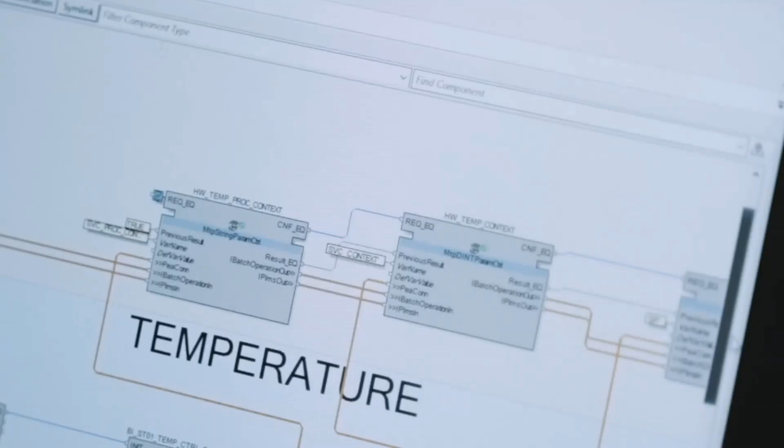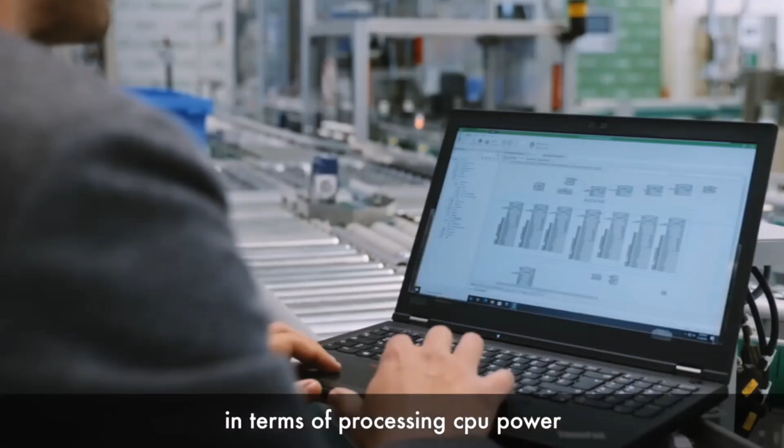universalautomation.org is about sharing a technology, a shared runtime execution engine. We call it a game change in automation because we have first one technology which is based on the IEC 61499 standard, which aims at decoupling hardware and software. Hardware itself is becoming very performant in terms of processing and CPU power.

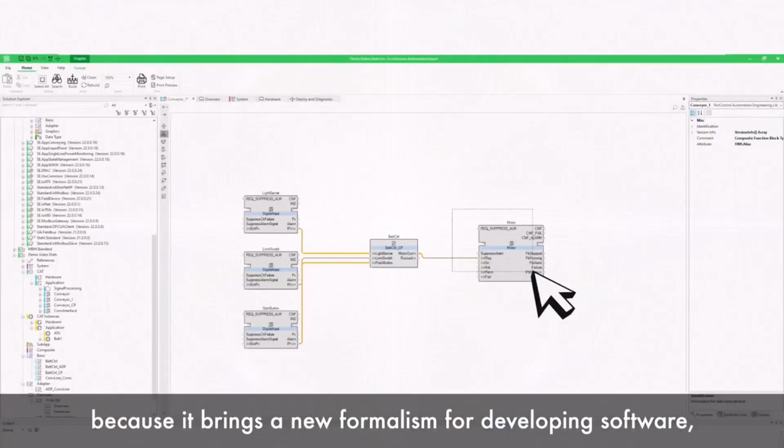And the future is more and more about software. This approach is really a winning approach because it's very flexible. You develop the application once and you can reuse it in each different configuration. That's exactly what Universal Automation and 61499 enables, because it brings a new formalism for developing software, which is object-oriented in nature and which allows deployment over distributed hardware for the actual final control system.

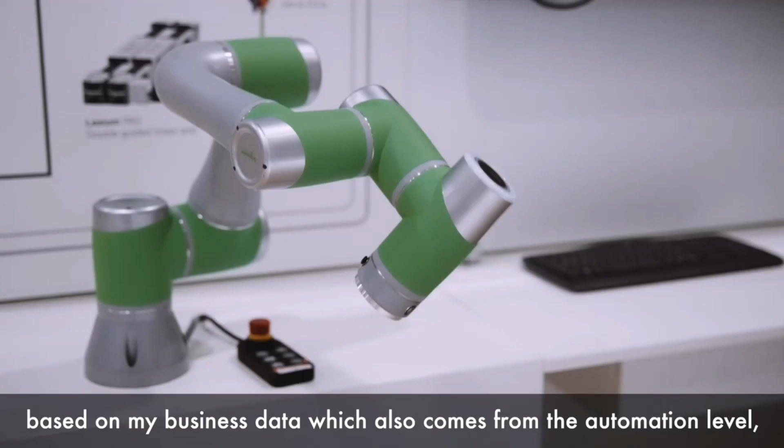So let's say that it's a marriage made in heaven. If I want to make more conscious decisions based on my business data, which also comes from the automation level, I need universal automation to get this data in an efficient way and with the right engineering efforts on the level when I can do and run the analytics.

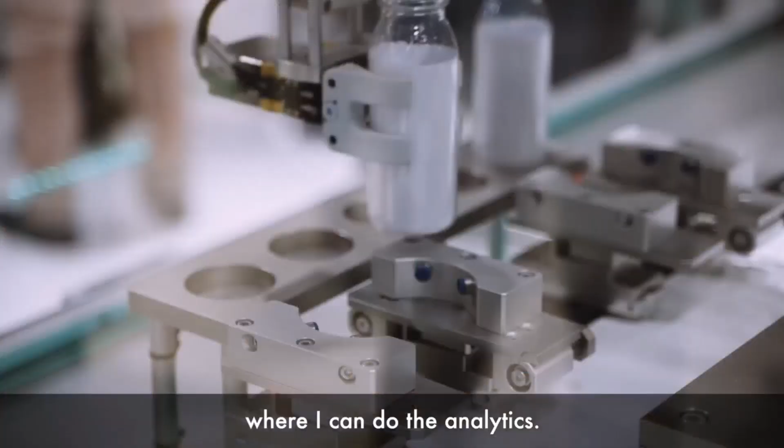Offers are available, not just from Schneider Electric with EcoStruxure Automation Expert, but also from Advantech, from Stahl, from ESA in Italy, and from other companies.

Advantech is growing really fast. And I believe if you want to keep on growing in the future, you need to be able to innovate. And when I see the universal automation approach, it is exactly the way of innovation we need to go with.

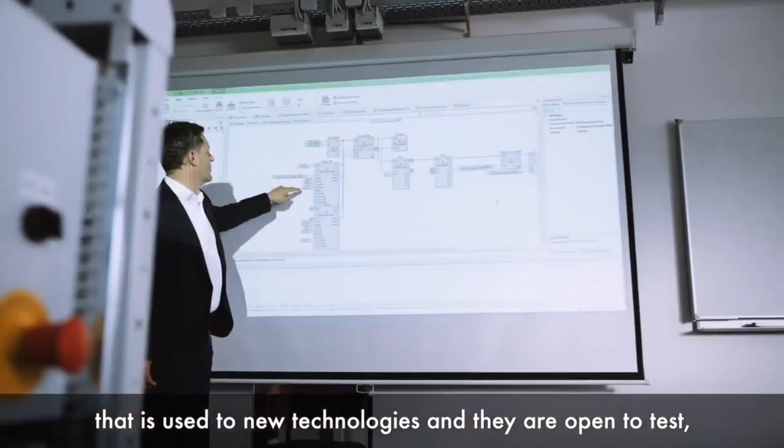Most of our customers from process automation are pretty conservative, so never change a running system. But now we see a new generation coming up, who are used to new technologies, and they are open to test, to try these new functionalities. And I think most of them pretty well understand the advantages of this.

I've been doing this now for 20 years, and I think over the years, this is the most exciting change. From my experience, I see that in IT, for example, there has been a big revolution. And I expect the same in automation. I don't know when it will happen. Probably it takes a little bit of time, but probably a revolution will come.

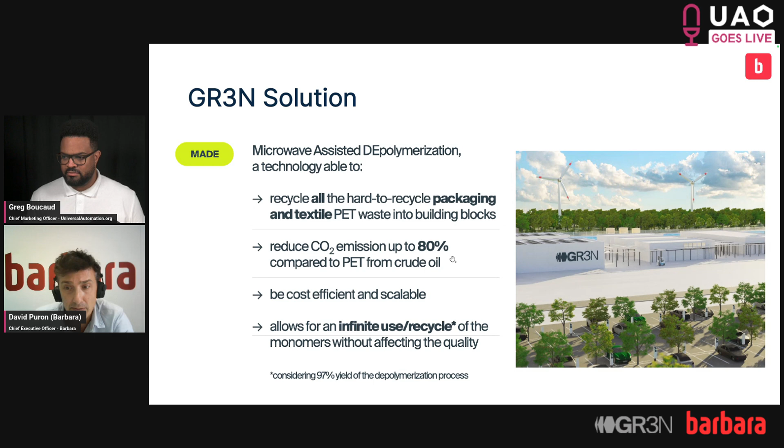Sustainability is something we really need these days. The challenge Gr3n has is that their manufacturing or recycling lines need to handle different types of plastics - bottles of different materials, different types of blends, and so on - and they are able to obtain high purity monomer from any material.

So the thing is, they are working in a very dynamic manufacturing process. It's not a process that is always the same. It really changes depending on the type of materials they are using.

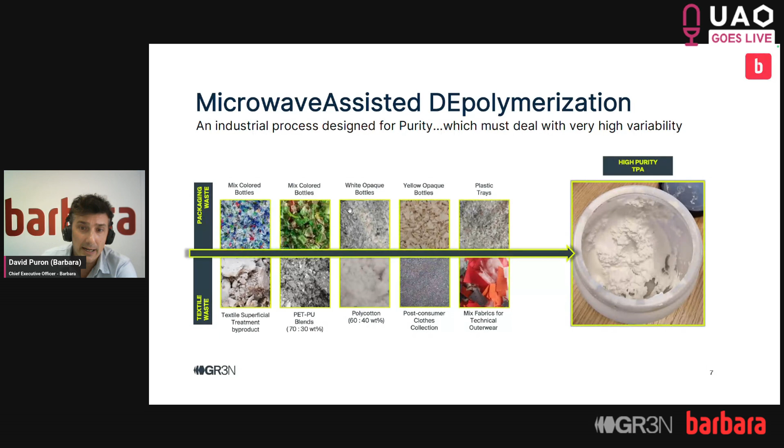Gr3n has already created one recycling plant, and their requirements were very aligned with what universal automation is offering and promoting. First, they needed a modular engineering process, so they needed to design their control logics in a very modular way. They needed to deploy and develop protection rules for their reactive units, and most importantly, they needed to reduce engineering costs during the market scale-up.

For that, they chose the UAO runtime architecture, deploying the UAO runtime in 6 of their process cells in the factory. The UAO runtime helps them create logic in a vendor-agnostic way - it can be deployed on any hardware, and programmed and reprogrammed again and again during the life cycle of the plant and the company. This allows them to work in a highly modular and highly scaled way.

The project is not small - it's around 128 monitoring sensors in the plant, about 500 input outputs in 9 control cabinets. In these 9 control cabinets they deploy an industrial PC, and this industrial PC has the UAO runtime that can be programmed from the IDE. So this is, let's say, their core automation architecture.

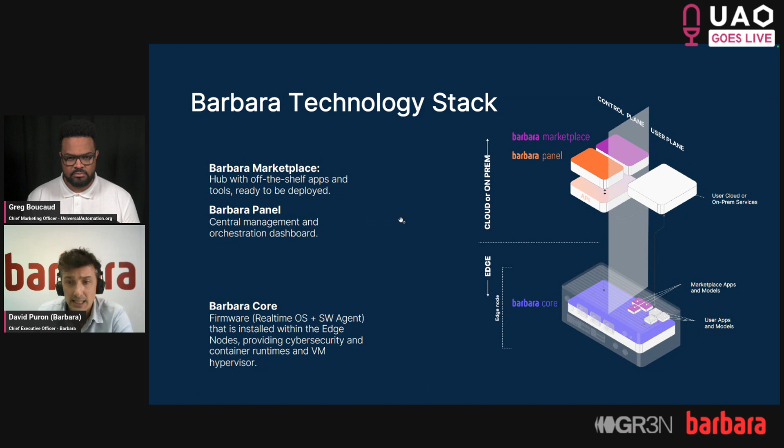So this is the architecture of Barbara, but in the sake of time, I will skip this slide and go directly to what we've done in the project.

So in the project, we have installed our firmware in the industrial PCs, which in this case, for the first testing and the first plan that we are doing together with Gr3n, are ASRock Industrial IPCs, in particular the model IEP 5000G. So here we have installed our operating system, which is called Barbara OS.

And from Barbara OS, you can manage remotely from the management panel, which is here at the top. You can manage the applications that are distributed in those industrial PCs.

So we have put one device per cell, per manufacturing cell. And then we have put other devices, in this case virtual devices, that also have the Edge engine from where we can deploy remotely the other applications. So all this is managed from a centralized platform, which is called Barbara Panel. And I will show Barbara Panel in a few minutes, so you will be able to see it.

But the thing is that using this orchestration platform, first of all, the runtime development environment, which in this case is Schneider EcoStruxure Automation Expert, through this system it can connect remotely to any runtime, no matter where it's in the world. If you have 1,000 or 10,000 industrial PCs with the runtime distributed all over the world, using the built-in capabilities of Barbara, the development environment, in this case EAE, can control and deploy logics into those runtimes remotely.

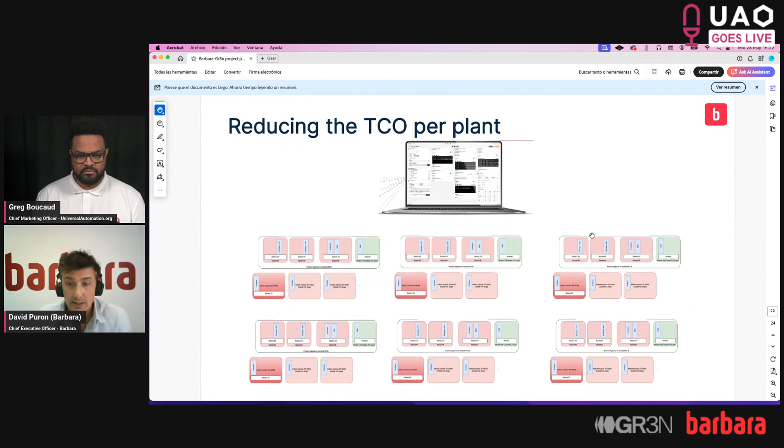So all in all, the idea is, as Greg was explaining, to be able to scale a project, passing from one plant to multiple plants. This is how the Gr3n project will look in the future, with a lot of devices, runtimes, and application instances, all controlled from a single pane of glass, which is the Barbara panel, our orchestration platform.

So our orchestration platform is integrated with the UAO runtime, so that it can deploy and configure the runtime remotely, but also other applications like analytics, dashboards, databases, logic programmers like Node-RED, and many other things.

So with that, basically Gr3n and Barbara are trying to define a kind of blueprint for scaling projects into multiple plants, global plants for data-driven manufacturing. So I think we are very pioneering in this.

So the use of the UAO runtime has been key for Gr3n in order to let them deploy control logics very quickly in a vendor-agnostic way, future-proof for future modifications. But also the seamless integration with Barbara's orchestration is providing the scale to make this project a reality, not only for one plant, but for multiple plants all over the world.